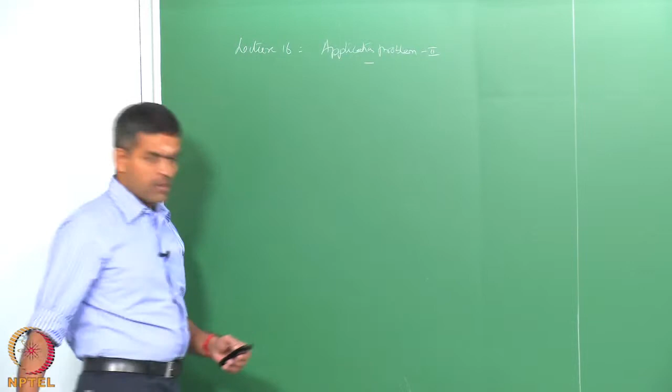Interestingly, in this example, we will talk about stability of tethers under distinctly high sea waves and seismic excitation. So, we are talking about stability analysis which will lead to the safety interpretations of compliant offshore structures.

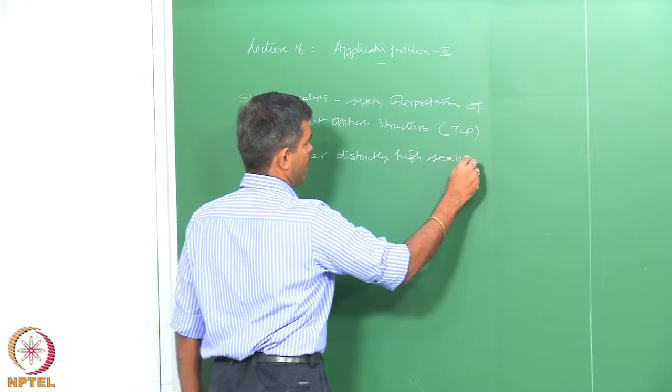We will take an example again, a tension leg platform. We will examine this under distinctly high sea waves and seismic excitation.

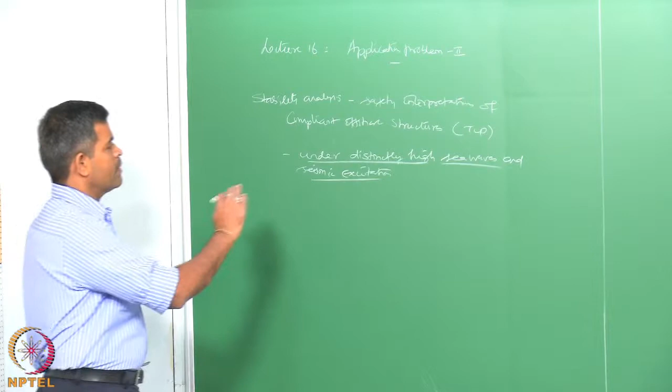This is a very interesting study. The study has references cited in the NPTEL website. Please look at those papers on relatively the same topic authored by me and my co-authors. We are anyway presented interestingly for the safety interpretation.

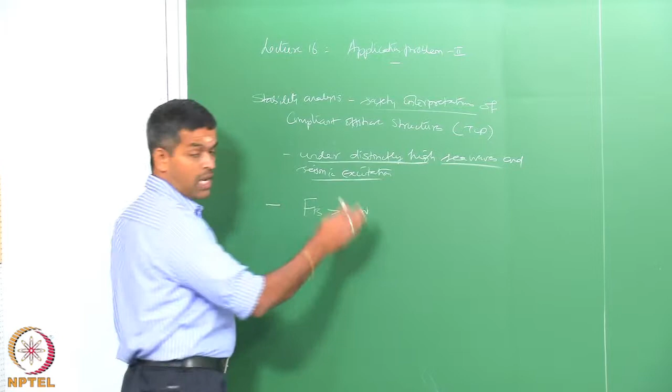As we now agree and understand, the compliant system like TLP where the buoyancy force exceeds the weight by a large number is always compromised by excessive initial pretension on the tethers. So any variation on this T0 value, which is the initial pretension, could challenge the stability of the platform.

Why are we re-insisting this statement? It is because of the fundamental reason that in compliant structures like tension leg platforms, initial pretension plays a very major role which actually bridges the static components of the buoyancy and the weight of the system.

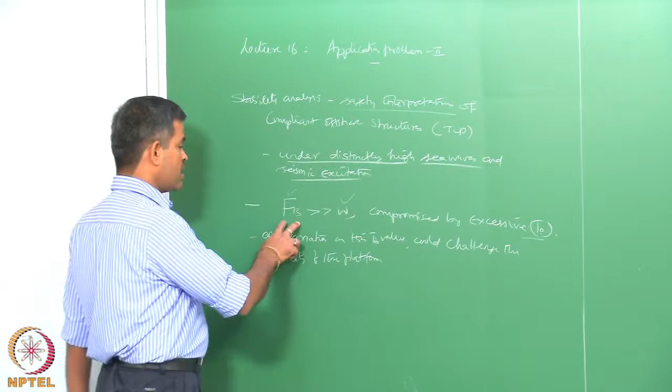However, when the platform oscillates with respect to its mean position under the action of wave, wind and current, obviously the buoyancy also changes because of submerged volume change, and the buoyancy changes will incorporate appropriate changes in the tether tension variation, which is dynamic in nature.

So in a given life system of the structure like TLP, the tether tension variation is going to happen continuously. I would like to show that this tether tension variation caused by extreme wave cases, that is distinctly high sea waves, in the presence of seismic excitation, poses a very interesting problem.

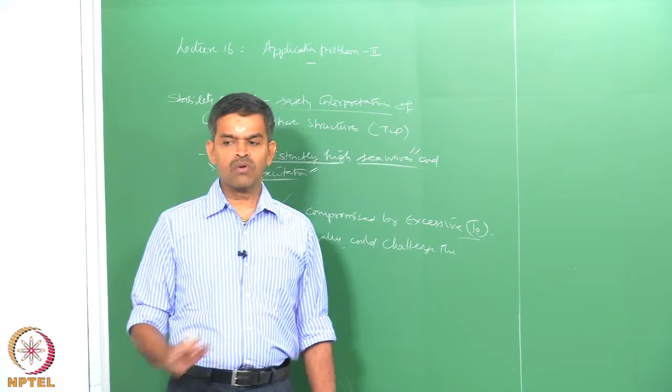As reliability actually bridges the satisfactory performance of a given system under a given load combination under given conditions, we know that reliability is an assessment of performance of a system under given conditions.

In our case, the conditions are load combinations, for a specified period of time, for a specified period of time - in our case it is going to be the lifetime of the structure.

So reliability is actually an assessment of the performance of the system under the given conditions for a specific period of time. In this present example, the objective is to analyze

stability of the platform under dynamic tension variations caused by extremely high sea waves and seismic excitation. That is what our objective is.

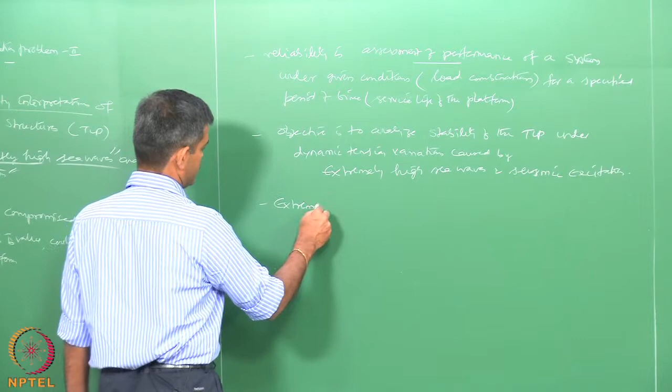Of course, it requires a dynamic analysis, we will look into that. Interestingly, extremely high sea waves plus seismic excitation is an extreme load combination.

This study is numerically simulated. One can easily understand that experimentally such waves and such conditions cannot be simulated. Therefore, the study is on a numerically simulated model of a TLP.

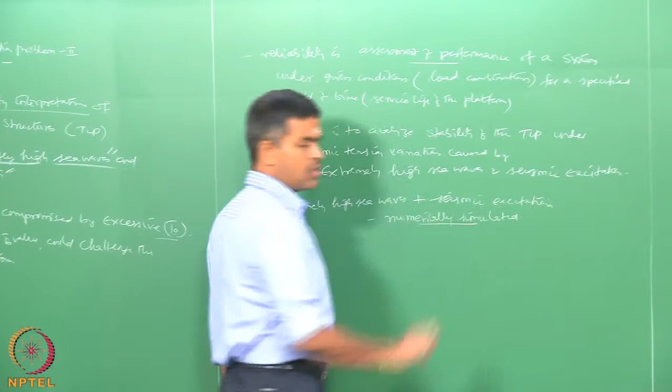One is interested to know the dynamic response of a system under such extreme load combination using a numerical example. So we will talk about this now.

Interestingly, one should now understand the mathematical model of TLPs. One has to explain at least briefly the mathematical modeling which has been done for modeling the TLP under the extremely high sea waves in the presence of both horizontal and vertical seismic excitation.

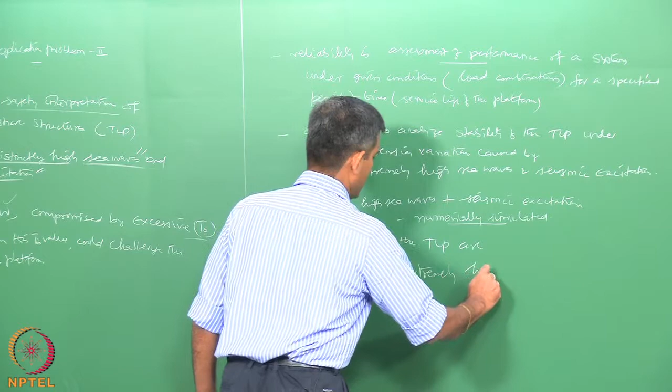So the loads acting on the system, in our case TLP, are: extremely high sea waves, which is a special case,

One may wonder why we are actually doing a reliability analysis for extreme load combinations. Reliability analysis is always assessing the performance of the given system under the given condition. We assume a condition that may violate, that may challenge the safety of the system, and we are assessing whether the system will remain safe under the expected conditions.

Under normal operating conditions, if you look at the reliability analysis, it will always indicate that the system is safe. So the unsafeness of the system can only be examined when the normal operating conditions, or the sea state, is violated to an extreme sea state. In the earlier example also, we took an extreme sea condition. In this case also, we have taken an extreme combination where the sea waves are extremely high, and second, the presence of seismic excitation.

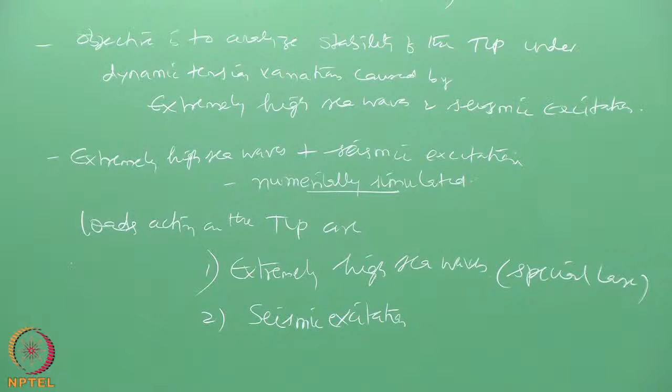Now, the problem is made more interesting because of two reasons. One, the analysis should focus on how to actually simulate or generate an extremely high sea wave. So one should exactly know what is meant by extremely high sea wave. Do we have any equations which can help simulate such a wave? Do we have any ready-made spectrum available in the literature which helps generate extremely high sea wave? How does literature classify a sea wave to be extremely high? We should know this first.

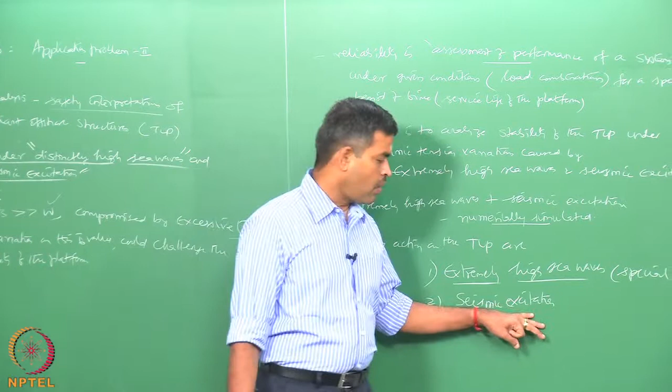Secondly, what is the interest of seismic excitation on a compliant system? This is a fundamental question asked by every structural engineer to understand the complexity of seismic excitation on a floating system.

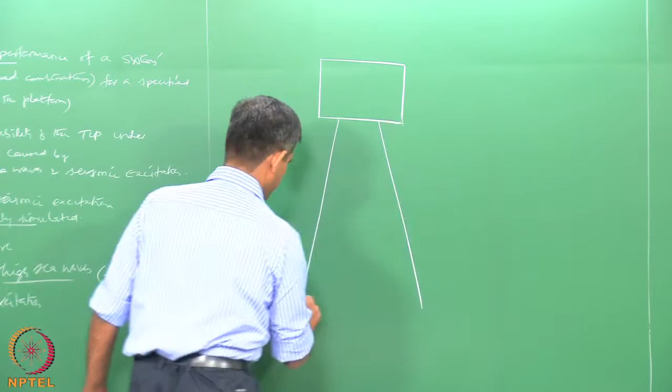Now let us look at this example very clearly. If I have a system which may be a jacket platform, an offshore structure, a jacket platform, or a building - let us say a multi-story building founded on piles on soil, subjected to lateral forces.

In this case, the lateral force is obviously going to be wind. In my offshore system case, the lateral force is going to be the wave for the substructure, and of course wind for the superstructure.

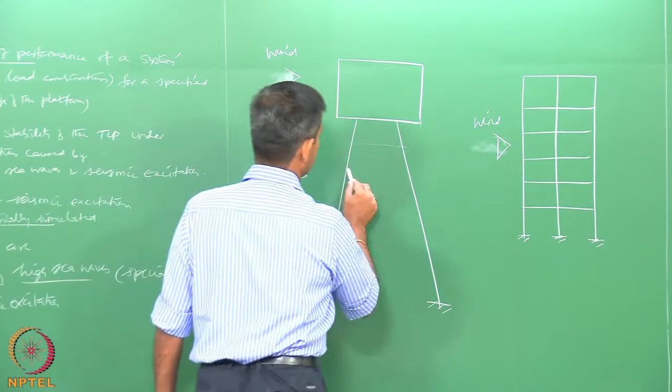So I have again the jacket legs which are battened and laced. I have a system like this.

Now let us imagine in both cases seismic forces are excited. So there is a signal which causes displacement of the ground at this point.

There is a signal which causes displacement of the system at the ground point.

Along x, along y, and along z. This is a seismic time history which gives the seismic acceleration x double dot g - acceleration of the ground along the time. So it is a time history.

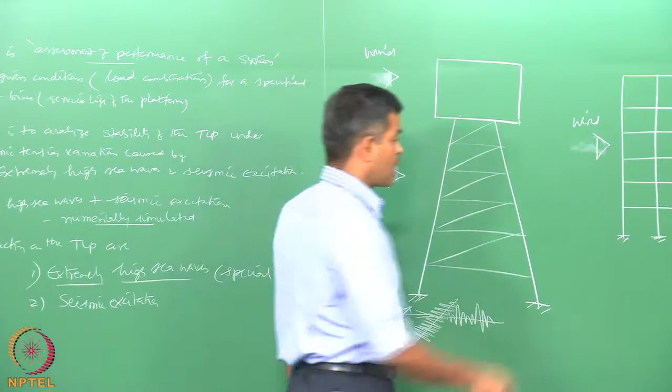So if this time history is imposed at the connection points of the columns or connection points of the column members of this building, obviously you will see the effects when the column members or the column legs of the jacket are involved.

When these members are displaced continuously over a specific period of time, this induces additional stresses to the members, which may cause them to fail in both cases - in the jacket structure as well as in a building.

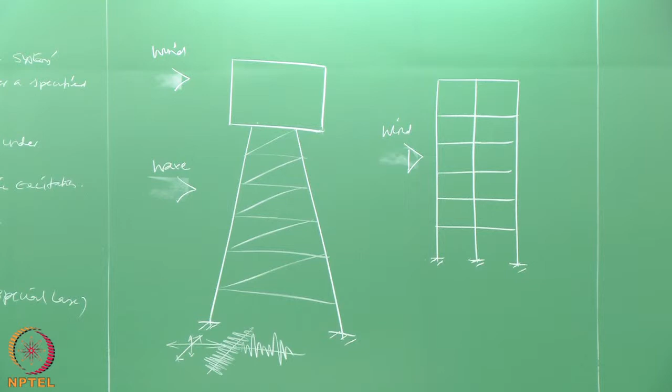Now if I remove the support system, let us say I have a support system of a different order, as in the case of a floating system.

Let us say I have a tension leg platform.

Which of course has the flare boom, it has a helipad, it has living quarters.

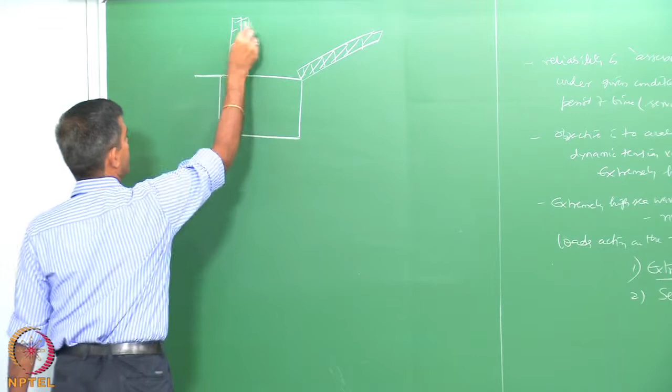It has turbo machinery, it has a drilling mast, etc.

All topside details as usual, and there are column members and pontoon members. There is a top deck of multi-tier, let us say, and now they are.

Station kept or position restrained using what we call tethers. So we all know now that TLP is a process by which buoyancy exceeds the weight by a large amount. Weight acts downward, and we know buoyancy acts upward against gravity. Buoyancy depends upon the submerged volume of the system.

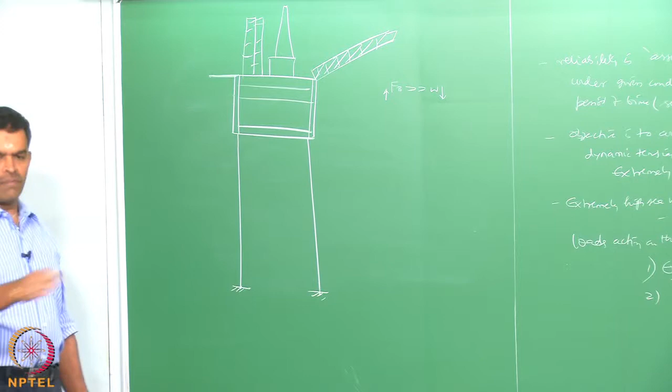I have got a very large platform with very large diameter members, so the submerged volume is very high. Therefore the buoyancy force acts in the upward direction, whereas the weight of the platform acts in the downward direction. There is a very great imbalance between these two, which will be bridged by the initial tension in the tethers.

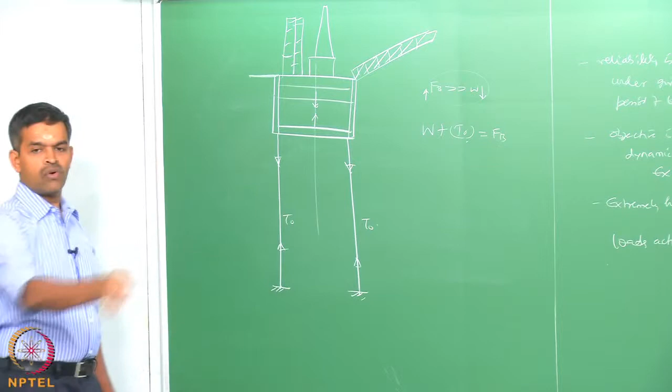So tension is imposed on the legs - what we call initial pre-tension in the tethers, called T0, on each leg. If there are 4 sets of legs and each leg has tethers, there will be 12 tethers, as we normally saw in the previous example as well.

Okay, so now interestingly let us impose the same earthquake signal here along x, along y, and along z. History is imposed.

So earthquake history means along the time history, acceleration is imposed and the ground is displaced by a specific intensity. Now the question is - we all agree and understand very closely that when the system rests on the seabed.

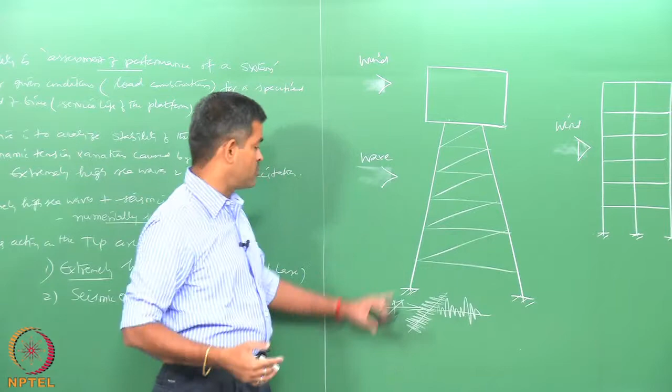Or on the floor where it is founded using a pile rigid connection, obviously the displacement of the ground will get transferred to the support system, which may be a column or a jacket leg, as the case may be.

Whereas in this case, you know, they are actually tethers or cables. They are nothing but cables.

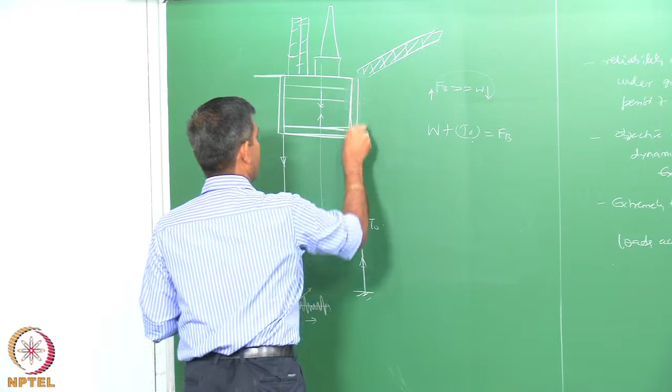Okay, let me redraw this. They are nothing but cables. So they do not - they carry only axial tension.

Tethers are capable of carrying only axial tension, no compression. So if you have any force imposed on this as a compressive force, the cable cannot carry this force.

Now the system is actually remaining - the topside deck is about, let us say in our case, as we saw maybe about 600 meters water depth, 1200 meters water depth, 1100, 800 etc. Very deep water platforms.

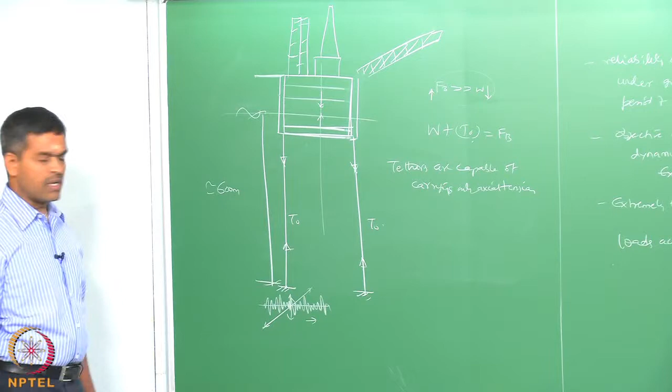When I impose an earthquake signal here which causes a displacement of the ground, it is obvious to wonder how this force or displacement will affect the behavior of the superstructure. Our whole scenario is to study the safety or stability of the platform when it is connected to the seabed using tethers. When the platform is disconnected and the tethers are not attached, it becomes free floating, because buoyancy exceeds the weight by a large amount.

When I am station keeping it, holding it using tethers to the seabed, the position restraint is imposed as a condition to the system. Then the system is not allowed to move freely to a larger extent, but it is allowed to displace because of the action of water, waves and current.

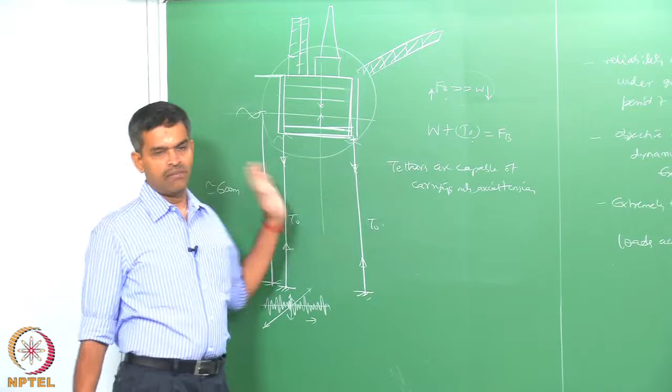In such a situation, when earthquake signals are imposed, how will this cause an additional displacement to the system, because the system is not directly resting on the seabed, it is only anchored using cables. It is interesting to realize that any movement in this direction or that direction will impose displacement. Let us say the system is displaced by this amount.

This position, compared to the earlier one, will have a change in T0. I call this delta T0. Delta T0 is the change in tether tension. Let us say hypothetically this is purely caused only by the displacement.

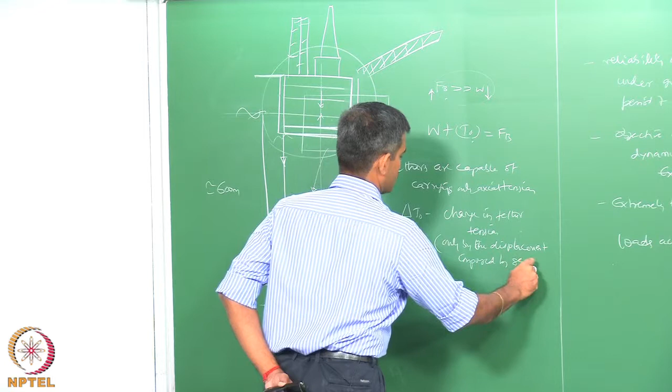Imposed by seismic forces. So the change in tension now affects change in buoyancy and weight, because there is an imbalance between these two. Therefore, the set down effect caused by the submergence and the offset caused by the wave action, in combination with seismic action, changes buoyancy. The change in buoyancy will cause change in tension.

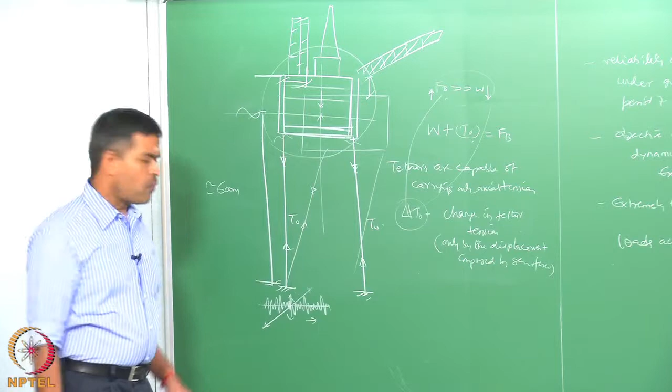Therefore, earthquake signals are imposed indirectly as a change in tension in the whole system. This change in tension is what we call dynamic tether tension variation, which causes imbalance. Now, my worry is, under such imbalanced condition, when the dynamic tension is imposed by the earthquake signal in the presence of distinctly high sea waves, will the system remain stable? Is it safe?

That is the problem formulation, that is how we are imposing the problem to the system to find a solution. Is it going to remain safe? The reliability of the system under extreme load combinations of distinctly high sea waves in the presence of seismic excitation will make the system safe or unsafe when it is performing its operation, for example, drilling.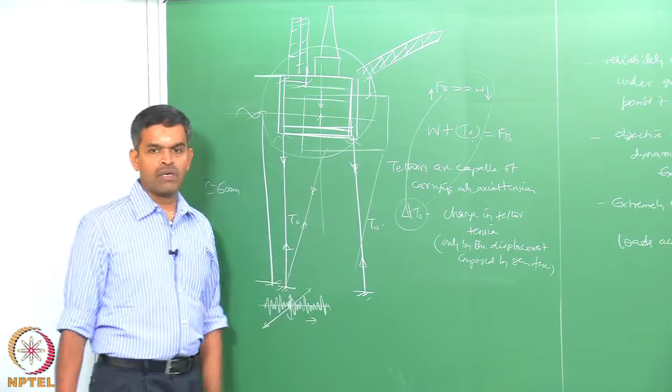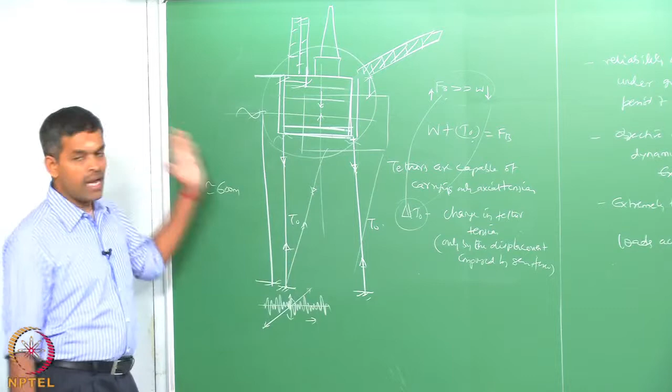Both horizontal and vertical seismic excitation should be imposed at this connection point to the tether. Seismic forces imposed at the bottom of each tether will cause an additional axial force that makes the tether tension imbalanced. I am only looking at the unbalanced or dynamic tension variation imposed on the T0 value, which is essentially caused by seismic excitation in the presence of distinctly high sea waves, when the hull is under offset condition.

When the hull is in static equilibrium, we are not bothered. When the hull is under offset condition, caused because of the wave force acting in the lateral direction, and seismic excitation also happens under that situation, will it cause a worrying factor on dynamic tension variation which will challenge the safety of the system while in operation? That is where reliability is being examined.

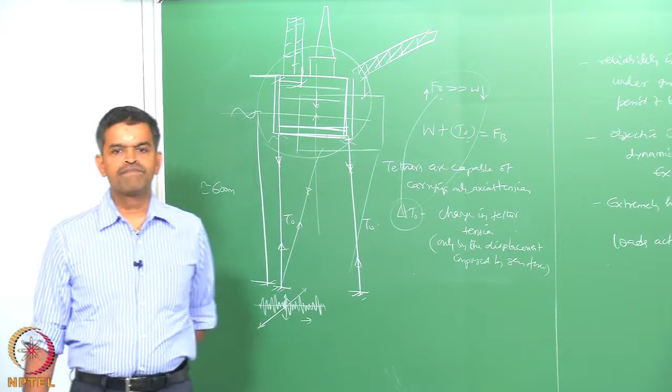Therefore, the tether tension variation caused by the seismic excitation should remain non-linear. So we first qualify a spectrum which can give me the acceleration of the sea quake or seismic excitation at the seabed. We use the Kanai-Tajimi spectrum for this. The seismic excitation is imposed or generated using the Kanai-Tajimi ground acceleration spectrum.

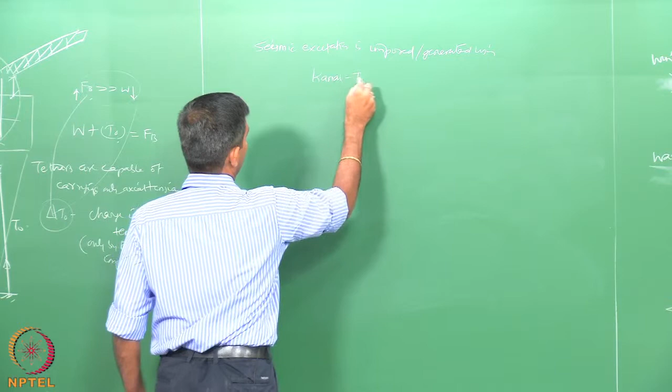To do the analysis, we need to make certain idealizations. So the following assumptions are made in the analysis. First, the platform is considered as a rigid body, having 6 degrees of freedom.

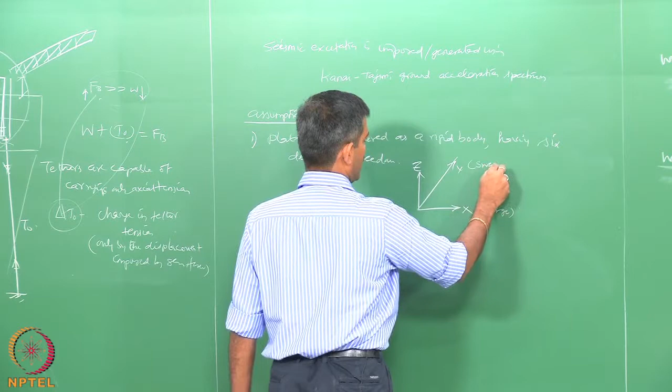The degrees of freedom are marked like this. This is my x axis, this is my y axis, this is z axis. This is surge along the x axis, this is sway along the y axis, this is heave along the z axis. These are the displacement degrees of freedom. If you keep your thumb towards the direction, the remaining four fingers will mark a direction, which I call the rotational degree of freedom. So about x it is roll, about y it is pitch, and about z it is yaw.

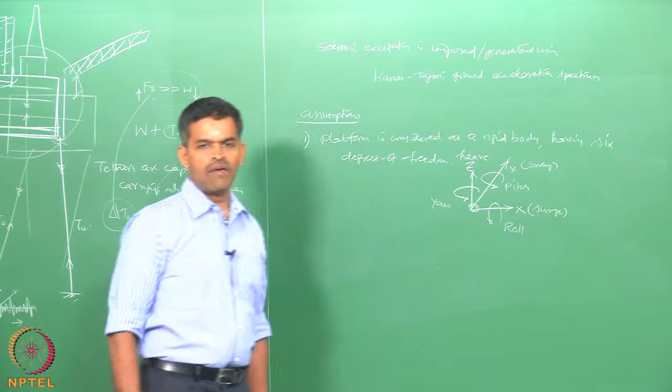So there are 3 displacement degrees of freedom and 3 rotation degrees of freedom at any point, which is obviously going to be the center of mass of the system. The platform is considered to be a rigid body having 6 degrees of freedom. The second assumption made is that water waves generated due to ground motion are neglected.

Only the ground motion is purely imposed by the seismic excitation, and water waves are only due to the wave loading caused by the distinctly high sea waves.

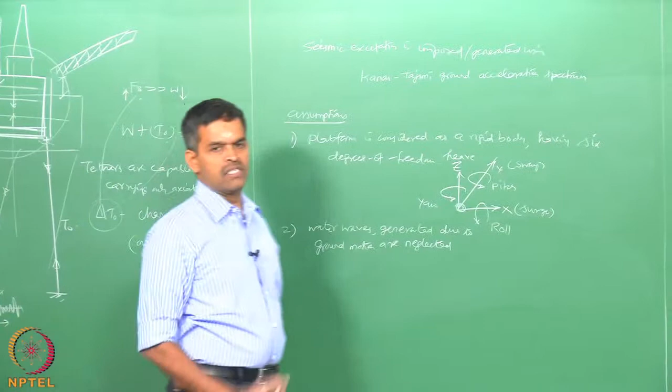The third assumption made is that the hydrodynamic force coefficients, which are the drag coefficient and the inertia coefficient, are the same for pontoons and column members, and they are independent of wave frequencies.

Fourth, the Cm value, that is the hydrodynamic inertia coefficient, is considered to vary along the water depth.

So, Cm values at the seabed, at the middle depth, and at MSL, that is mean sea level, are taken as 1.8, 1.58 and 1.5 respectively.

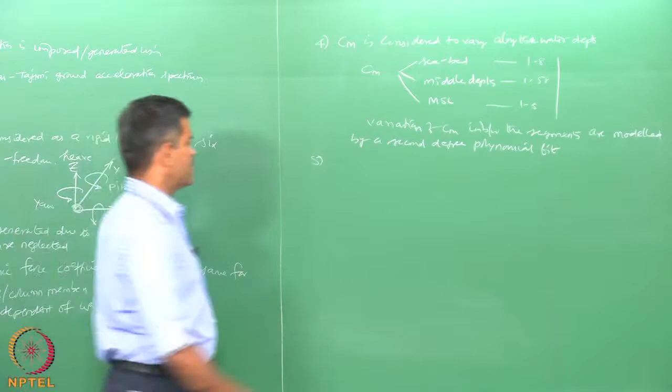The next assumption is about the stiffness of the tethers. The axial stiffness of the tethers, which we all know is AE by L, is modeled like this.

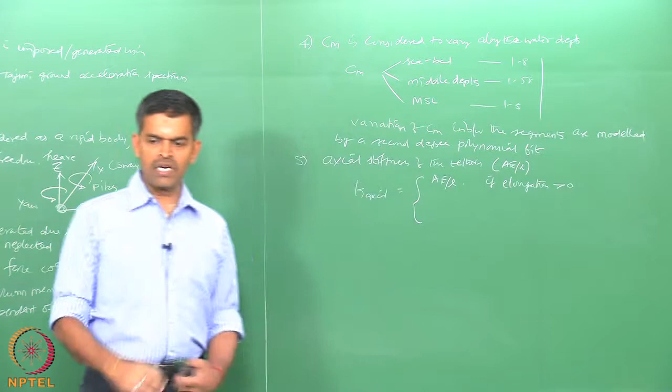So, the axial stiffness of the tether is given by two cases. One is equal to AE by L if the elongation is greater than 0, meaning from the initial condition it is elongated. Otherwise, it is 0 if the elongation is less than 0, that is, tethers under slack condition are not considered.

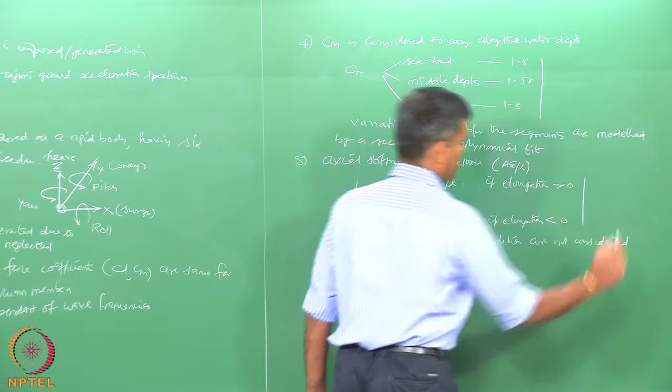The initial pretension reduction when the tethers become slacked is not considered.

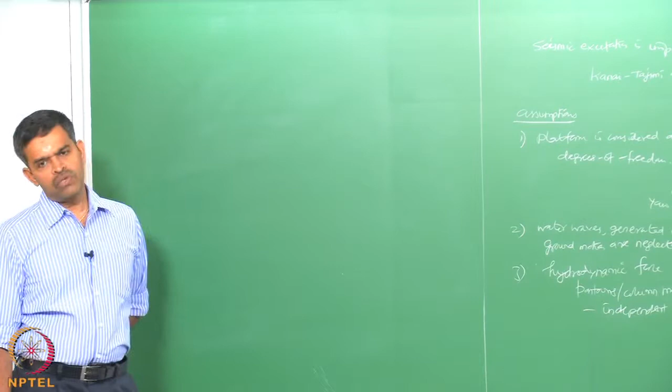As I said in the beginning, in this problem we have to discuss two things. One is the seismic force acting at the seabed, two is the distinctly high sea waves. What do you mean by distinctly high sea waves?

The shape of distinctly high sea waves is quite interesting for this problem, is crucial for the given sea state. So, to support this, there are experimental investigations conducted by various researchers to qualify a sea state or a sea wave to be called as distinctly high.

They are conducted to classify distinctly high sea waves. How are they classified? Kim et al. 1992, Kribel and Alsina.

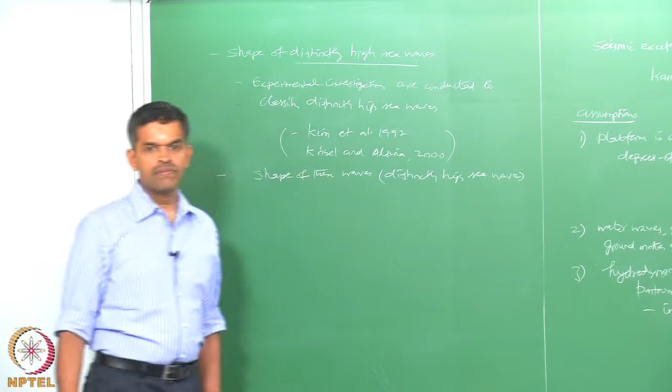One can look at these papers to know more about how to qualify or classify a given sea wave as a distinctly high sea wave. They stated that the shape of these distinctly high sea waves is steep. That is the first observation they made.

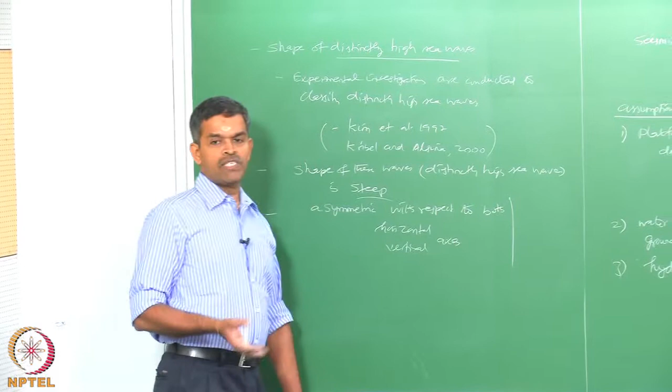Secondly, they are asymmetric with respect to both horizontal and vertical axis. So your wave should be asymmetric to both horizontal and vertical axis, and at the same time it should be steep. Now, the question is, when will you classify a wave as a steep wave, and when will you be able to generate a wave which is asymmetric with respect to both horizontal and vertical axis? If I am able to generate a wave which is steep and remains asymmetric about both these axes, I can call that wave a distinctly high sea wave as stated by Kim et al.

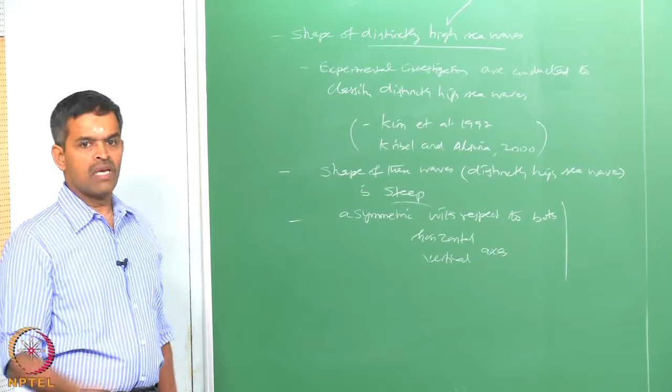And Kribel and Alsina. So the problem now is how to simulate such a wave which will qualify as a distinctly high sea wave with the help of experimental studies conducted by these gentlemen. That is the argument now.

So therefore, one can always say the experimentally simulated sea wave pertains to a limited boundary condition. In the real sea state, such simulated waves may not be able to produce the same effect as in the real sea state, because experimental investigations are done on a scaled model, therefore there may be a limitation.

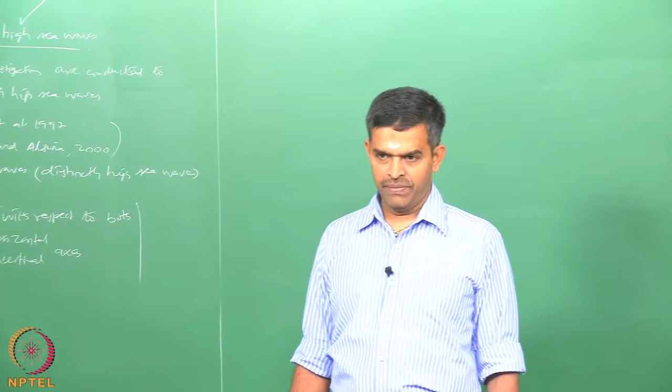So what we are interested in is understanding the effect of sea quakes or earthquakes in the presence of distinctly high sea waves in the real model. Therefore, I must be able to simulate both with a numerical system, not with experimental studies.

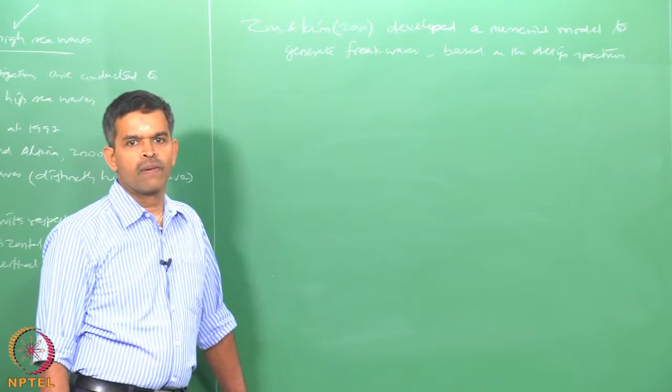Therefore, Zou and Kim in 2000 developed a numerical model to generate freak waves, based on the design spectrum, which can result in distinctly high sea waves.

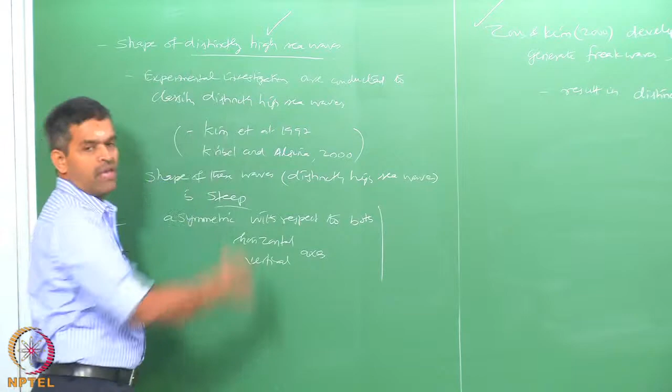So, that is one solution we have from the literature. Instead of going for a simulation done experimentally by these gentlemen, which helps us qualify a wave as a distinctly high wave, this gentleman gave us an alternate method using a numerical model to simulate a wave, which can also be called distinctly high, because it qualifies in the same manner as the conditions stated by these researchers at a different time.

In the present study, therefore, in this example, sea waves will be generated using a modified PM spectrum.

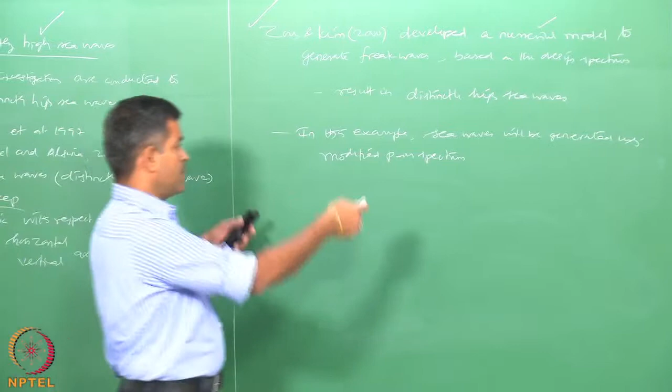Interestingly, one may ask: PM spectrum is actually a standard design spectrum. How will we be able to generate a wave which can qualify to be called a distinctly high sea wave using a standard conventional PM spectrum? That is why I said modified spectrum.

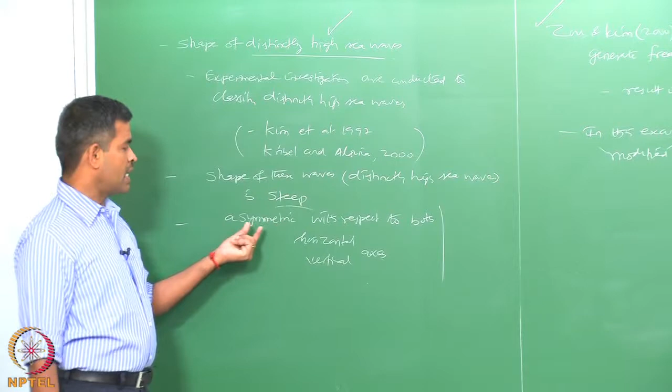To release this doubt from your mind, we will generate a spectrum using Pierson-Moskowitz spectrum modified with one parameter. We will then generate a time history from that. Then from the time history, we will check whether this wave is really steep and has asymmetricity about both horizontal and vertical axis. If this condition is satisfied in the enlarged time history of the simulated wave, then my condition of simulating a distinctly high sea wave is satisfied.

Now, the distinctly high sea wave is generated using nonlinear wave kinematic theory.

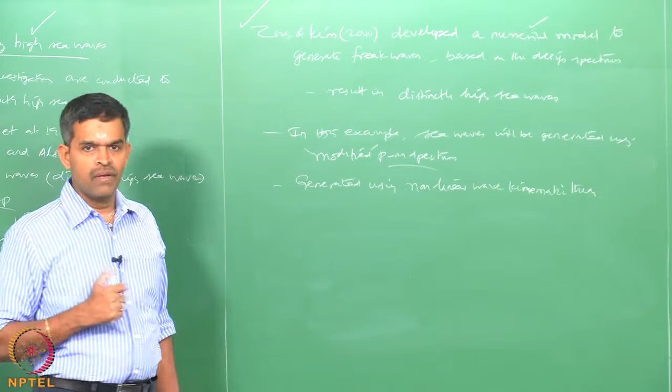When you generate a wave using nonlinear wave kinematic theory, certain factors are very important, because I have to qualify the wave first as a distinctly high sea wave. One important factor: nonlinear wave theories tend to become overly complicated, especially when a low order approximation is used.

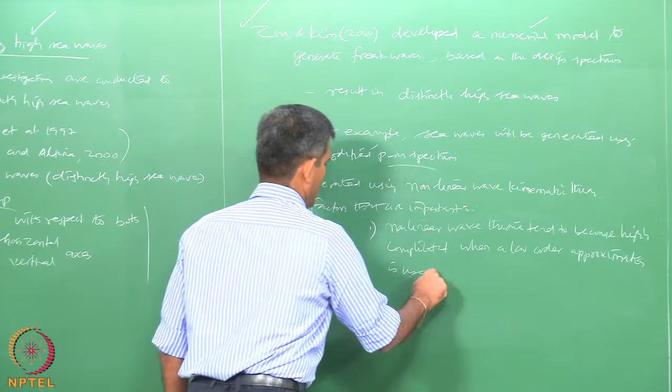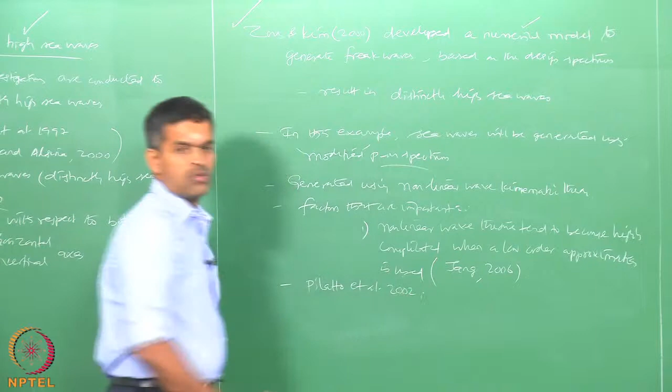This is as stated by Jeng 2006. Therefore, several researchers have simulated distinctly high sea waves successfully using simple Airy's wave theory. Researchers such as Pilato (2002, 2003, 2003b), as you can see from the list of references given on the NPTEL website for this course, have simulated distinctly high sea waves using Airy's wave theory.

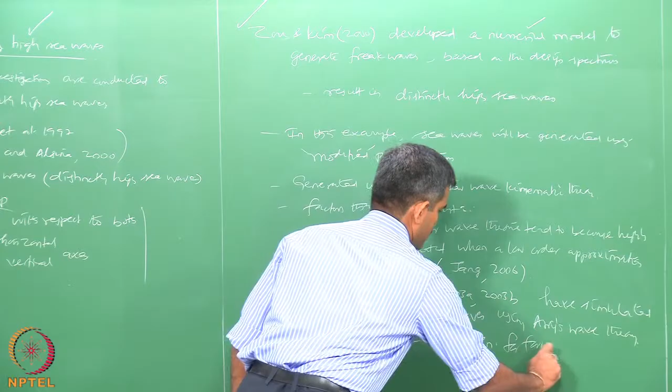And the force is calculated using the Morison equation, because the system is compliant. Water particle kinematics is generated using Airy's wave theory, and the random sea surface elevation using the PM spectrum. So this condition is like this.

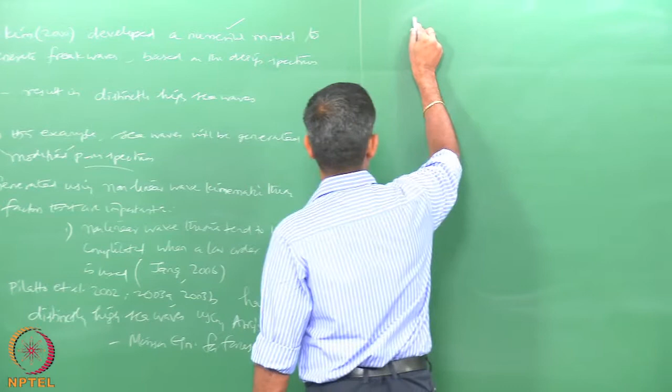Airy's wave theory for water particle kinematics, and sea surface elevation using modified PM spectrum. That is what we have used, which I will show you now.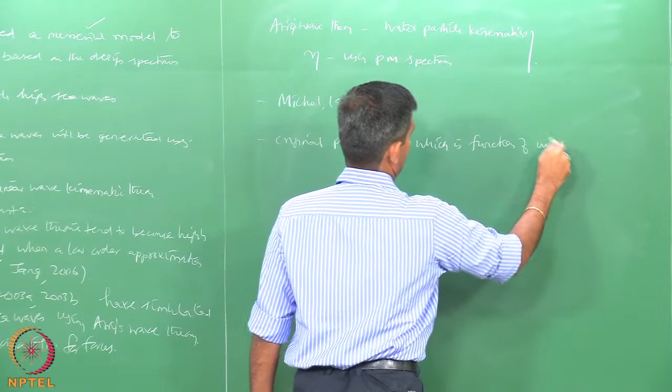Now, what is the modification done on the Pierson-Moskowitz spectrum? This modification was suggested by Michel in 1999. The original PM spectrum, which is a function of wind velocity, is modified as a function of modal frequency. That is the first modification done.

Secondly, it is further modified as a function of significant wave height and modal frequency.

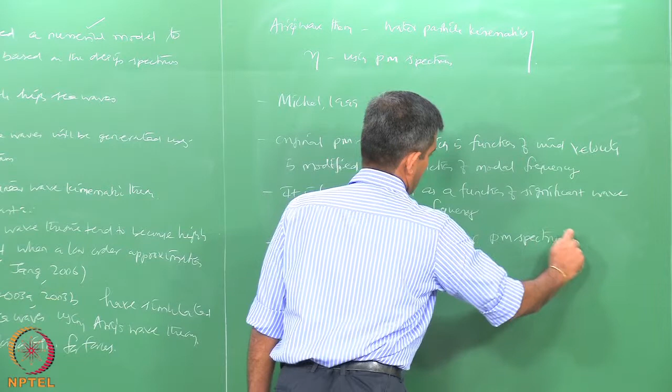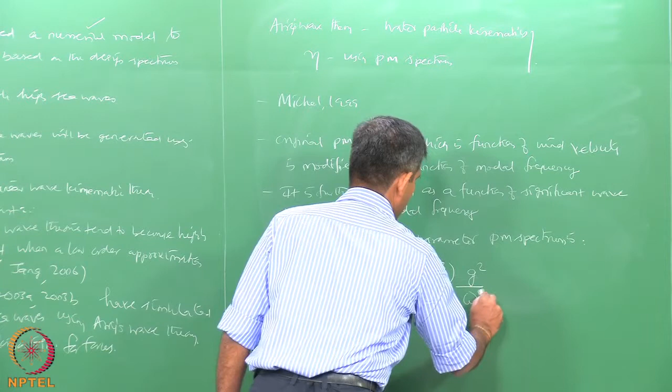Now, the modified one parameter equation is given by the following: S eta eta omega, the spectral function, equals 8.1 x 10 power minus 3, g squared by omega to the fifth, exponential of minus 1.25 times omega m by omega to the power 4. Call this equation number 1.

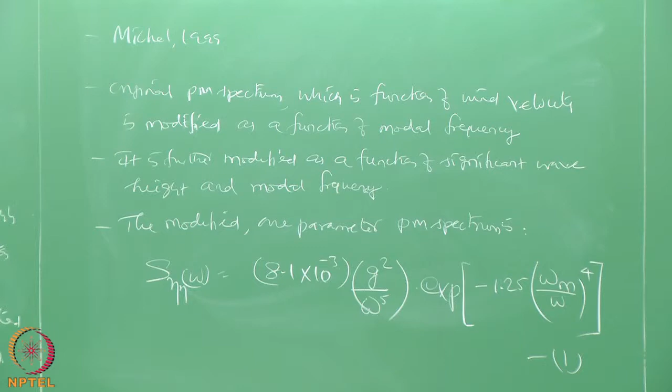Where g is acceleration due to gravity in the equation. Omega m is the modal frequency; in this particular simulation it has been taken as 0.46 radians per second, which is nothing but 0.07 hertz. S eta eta is this power spectral density function of the wave height, eta, the sea surface elevation.

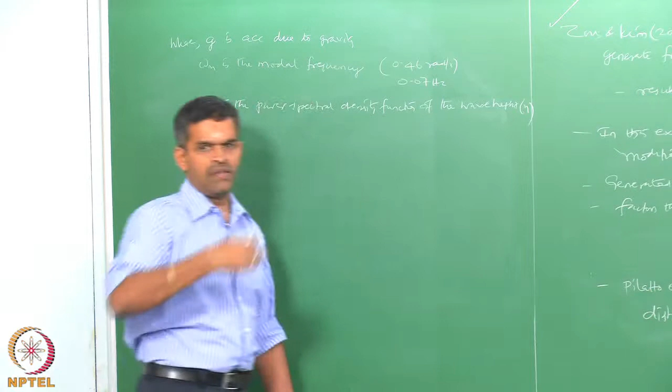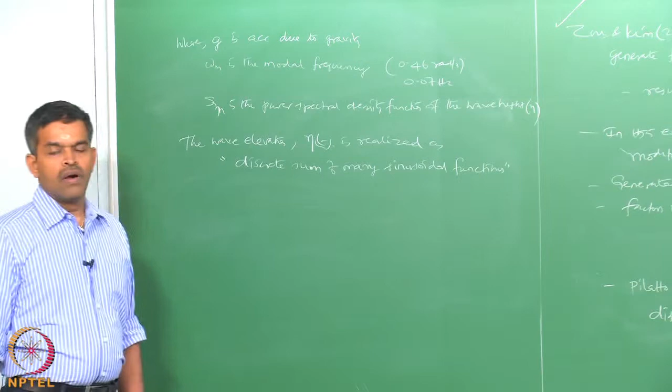Now, the wave elevation, eta of t, is realized as a discrete sum of many sinusoidal functions. Of course, when you do the discrete sum, it should have different angular frequencies and random phase angles; that is very important.

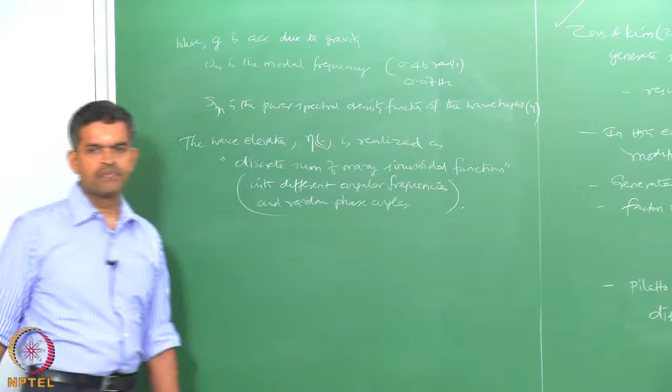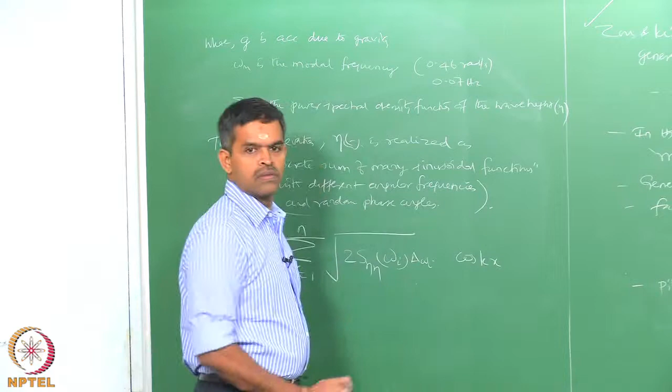So, eta of t is given by a discrete sum of different waves of sinusoidal function which satisfies this equation, call it equation 2.

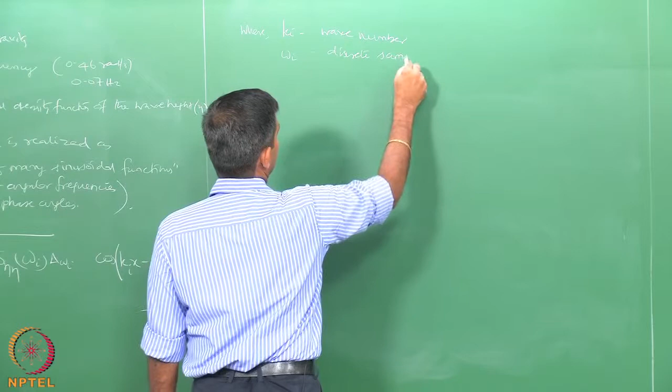Where ki is what we call the wave number, omega i is the discrete sampling frequency, which means delta omega i is given by omega i minus omega i-1. I will keep on generating the wave like this for the sampling frequencies; N of course is the number of data points, and phi i is the random phase angle.

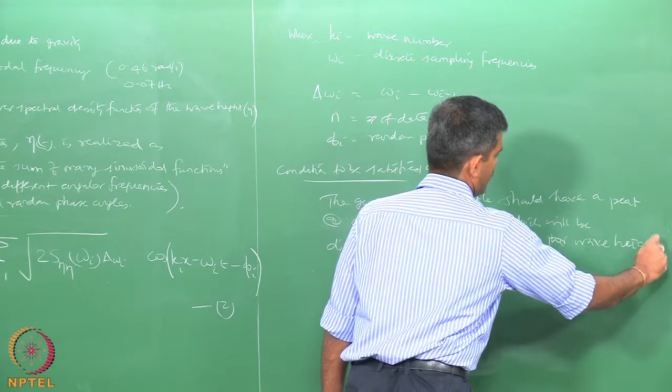Now, interestingly, what should be the condition satisfied? This is very important to make this wave a distinctly high sea wave: the generated wave profile should have a peak at a particular time t0 which will be distinctly high in comparison to other wave heights, and therefore I can classify this as a distinctly high sea wave.

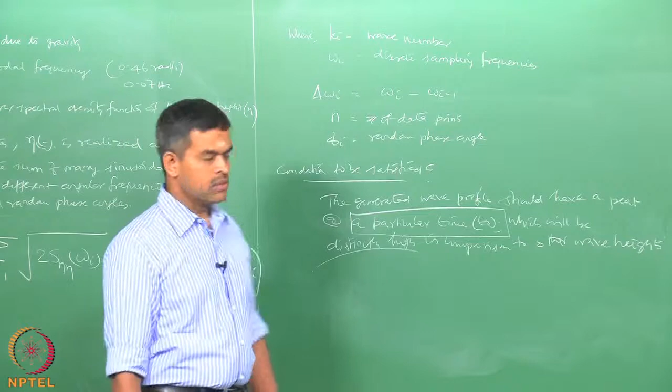So one has got to be very careful to choose this particular time t naught where the wave elevation is going to be distinctly high. Interestingly, the problem has two classifications: one is to generate a seismic excitation using the Kanai-Tajimi spectrum; the other is to numerically simulate a distinctly high sea wave, because experimentally simulated waves cannot be useful for a numerical study at 1:1 scale, it is very difficult.

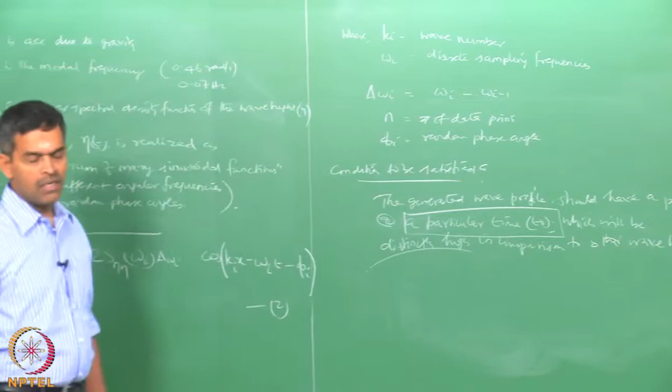So we have used Airy's theory and modified PM spectrum to generate a wave, which I will show you in the next lecture, how the wave has been generated. The wave should have steepness plus show asymmetricity both in horizontal and vertical axis. We will continue discussing this in the next lecture. Thank you.